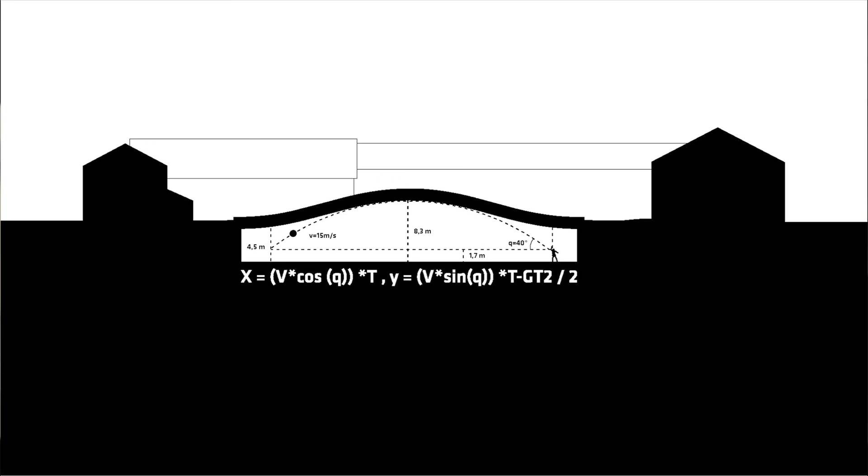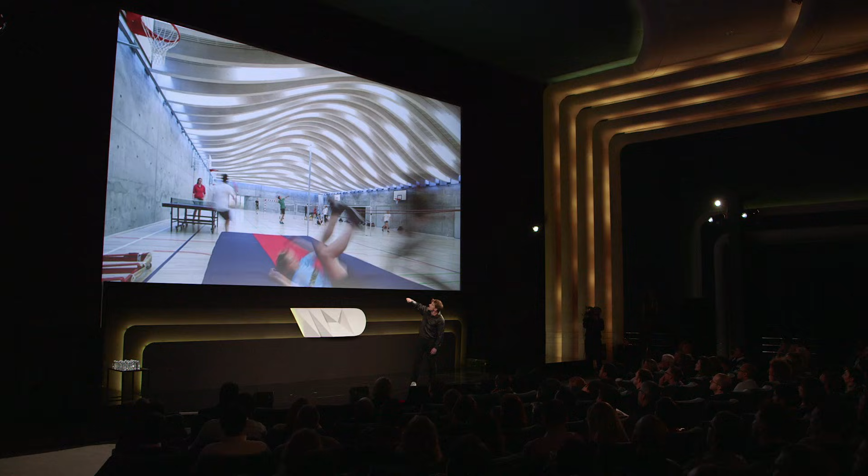On the perimeter you need 15 feet of clearance, and in the middle you need 25 feet of clearance. We actually got the commission from my old math teacher, so as a sort of homage, we based the architecture of the dome on the mathematical formula for a ballistic arch. So the graceful curvature of the glulam beams is actually shaped by the mathematics of the sport. Everything you see here isn't really designed, it's simply tracing the natural geometry of a thrown handball.

And as a result, it leaves an imprint up in the courtyard. It becomes like this informal furniture that has actually invited people to start hanging out. So almost like this cascade of effects - this basic tracing of the mathematics of handball suddenly creates this new space in the courtyard.

Another example is Hamlet's Castle Kronborg, north of Copenhagen. It recently became UNESCO World Heritage, and the Danish Maritime Museum used to be inside the castle, but they had to put it somewhere else. They suggested putting it inside the dry dock where they used to build ships. It was kind of a dilemma because UNESCO said we couldn't stick out of the ground as much as a foot, so as not to block the view of the castle. But of course, the museum wanted some kind of architectural masterpiece to attract people to come and check it out.

So we got this idea to use the museum as a way of preserving the dock, turning the dock inside out. We turn it into a giant void. All we have to do is design a series of bridges - one that stops the water from coming in, one that connects over to the castle, and one that takes you down into the museum. We could actually build all of the bridges in a Chinese shipyard and then sail them in and click them into place. So the architecture is completely manifesting all the aspects of shipbuilding, from the steel of the bridges to the concrete of the dock.

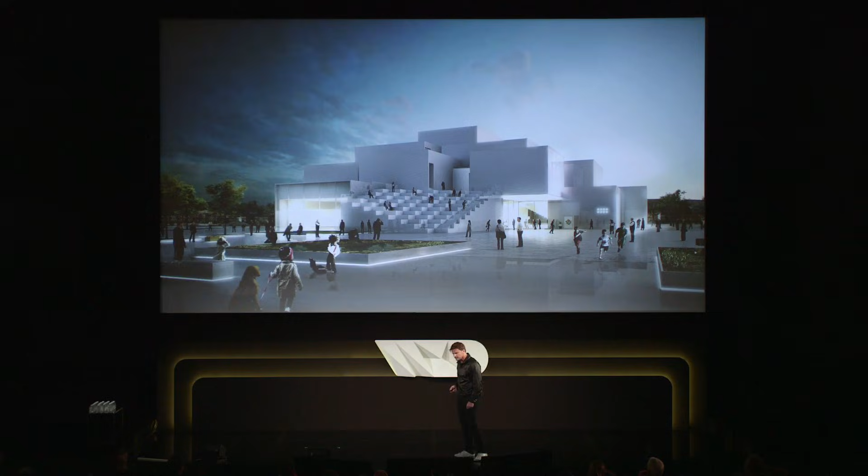But when they approached us to look at making a Lego house, which would be sort of looking at all aspects of culture through the eyes of Lego, we were incredibly excited. We went completely to town, and we really had to get this job. It's going to be where Lego is from, in Billund, Denmark. And essentially what really excites me about Lego is that Lego empowers children and everyone who plays with Lego.

to create their own world and then to inhabit it through play. And that's exactly what architecture is supposed to be about. It's, in a way, finding ways to empower people to influence their physical environment so that they can actually live the life they want to live.

The Lego house is under construction. This is me, standing on the foundations of these concrete Lego bricks. And this is me standing with all of the richest people in Denmark, the Lego family.

And if you can't wait, it's going to open in 2 years. But if you can't wait, you can actually build it yourself.

A way to get people involved is this idea of crowdsourced design. We did an urban space in Copenhagen, in the most ethnically diverse neighborhood in all of Denmark. It consists of what we call the Red Square, the Black Market, and the Green Park. You have 60 different nationalities living here, so the importance of the project was really to involve the local community and create a sense of ownership.

So we got this idea that it would be strange if the Danes had done the best bench and the best trash bin and the best lamppost. So we reached out to the local community through different media and through meetings and had people recommend elements from their home country. The basic idea is that we don't eat Chinese food to be nice to the Chinese — it's because we crave Beijing duck or noodles or dumplings.

And we didn't put a Moroccan fountain in the middle of Copenhagen to be nice to the Moroccans, but because they have an amazing heritage of architectural water features. So you have a Jamaican sound system — the neighbors hate it. A Thai boxing arena. You have Iraqi swings, litter boxes from Great Britain, bollards from Ghana, bicycle racks from Finland. The sign on the Red Square is actually a sign from the Red Square.

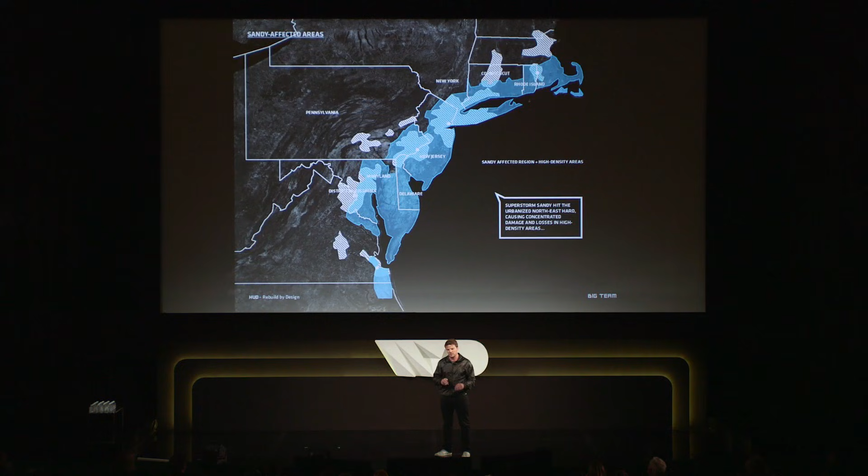Essentially, Sandy happened because the Atlantic hurricane belt is expanding due to rising temperatures. And because of the geometry of the New York Bight, you have this 90-degree funnel shape, channeling all of the storm surge into the most densely populated region in America, putting 50% of New York at risk.

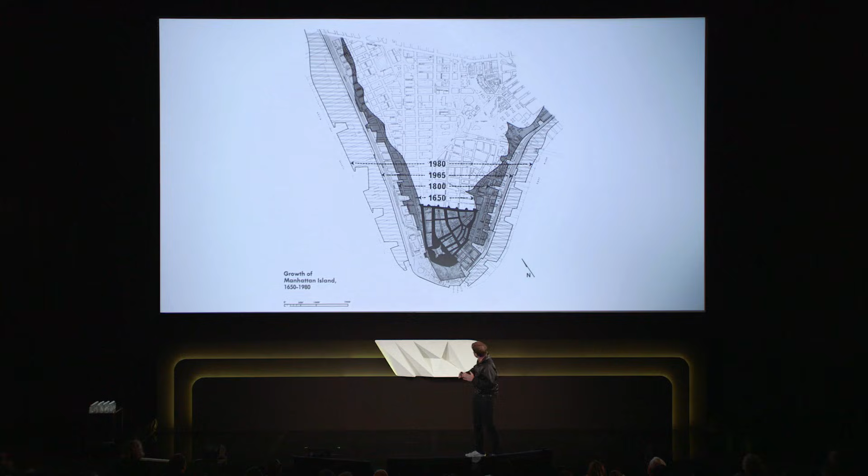If you look at this map of Lower Manhattan, you can see since the 17th century we've been expanding Manhattan through landfill, and this landfill is exactly the area that is now flood prone. So you can say the areas we've been responsible for creating are also the ones where we need to take greater responsibility in protecting. So the question is, how can you protect all of Lower Manhattan without creating a seawall that segregates the life of the city from the water around it?

We thought maybe we could learn a little bit from the High Line, a piece of decommissioned infrastructure that has now turned into one of the most popular promenades in New York City. We were thinking, what if instead of waiting for infrastructure to get decommissioned before adding the program, you could think of the resilience infrastructure for Manhattan as a Dryline, imagining it comes from day one with a lot of extra positive social and environmental side effects.

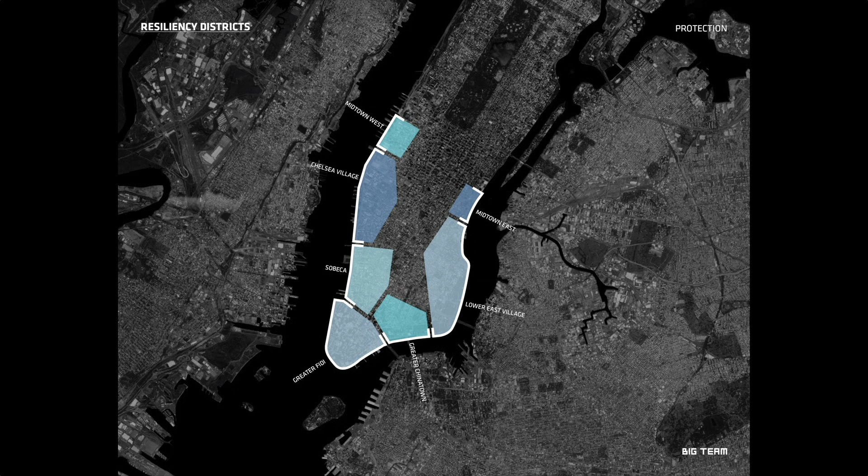When you look at the flood map, you have natural pinch points where the flooding doesn't get very far into the island because of the topography. So we use these to create compartments, just like you have compartments in a ship. Each compartment can sort of be solved on its own.

When you look at the urban development of New York, it's characterized by this David and Goliath encounter between Robert Moses, aka the power broker, and Jane Jacobs. Robert Moses did a lot of the necessary infrastructure investments of Manhattan, like the highways on the waterfronts and a lot of the social housing projects. But they were very top-down, and rarely instantly successful. They often cut people off from different neighborhoods, or cut them off from the water. One day he tried to cut a highway through Greenwich Village, and he met Jane Jacobs, who mounted a grassroots opposition, and eventually she defeated the plan, and Greenwich Village is still there.

We thought it could be interesting to think of this resilience infrastructure as the love child of Robert Moses and Jane Jacobs, because to provide 8 contiguous miles of waterfront protection, you need a holistic, big-picture perspective, but it needs to happen rooted in local communities. Essentially, the main challenge is to resist a certain amount of storm surge, you need a certain geometry.

But this geometry could be made in so many different ways, so that when you go there, you won't notice that this is actually part of a dam. It could be a piece of landscape that also becomes what protects the city from flooding. It could be various artworks, or almost like furniture, landscaping. You could imagine the median of the West Side Highway becoming an art piece that also protects the city from flooding.

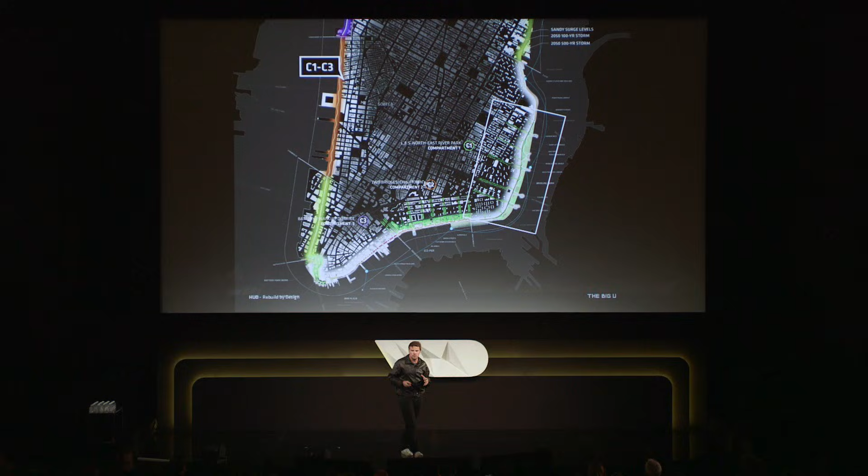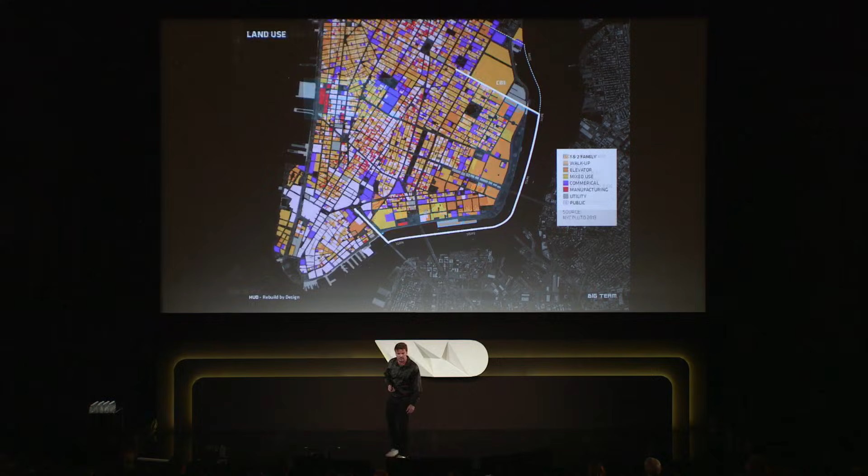As a way to do this, we went a step further. We went to the Lower East Side, which was massively hit by Sandy. These are the areas that got flooded, and when you look at the 100-year flood and the 500-year flood, actually two-thirds of this neighborhood is flood threatened. It's a primarily residential neighborhood, and this is actually a map of all of the public and affordable housing on Lower Manhattan. It's all inside this neighborhood.

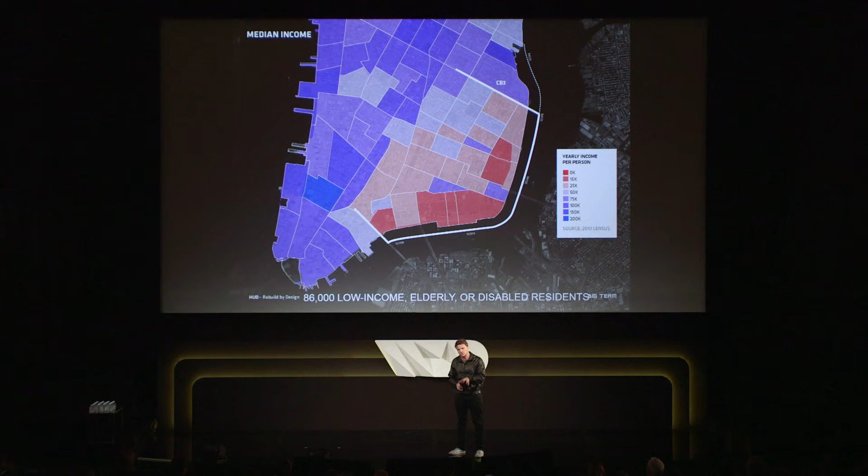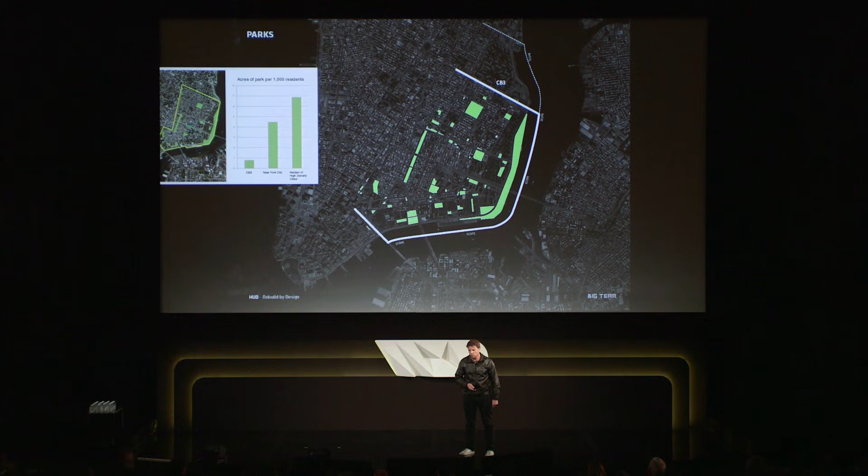It's also the most ethnically diverse neighborhood. It's the most socially challenged neighborhood. It's rather underserviced by public transportation, but in return it has a highway cutting it off from the waterfront. And even though it appears green, it actually has a lot less park than any other neighborhood in Manhattan.

95% of the surface is impervious, which also makes it more flood prone. And when you walk down the waterfront, you can see that it's tortured by this relationship to the infrastructure.

So we created this process where we reached out to the local community. We had a series of workshops with people from the Lower East Side, testing different ideas. We made a smorgasbord of different solutions, and together we formulated a series of strategies.

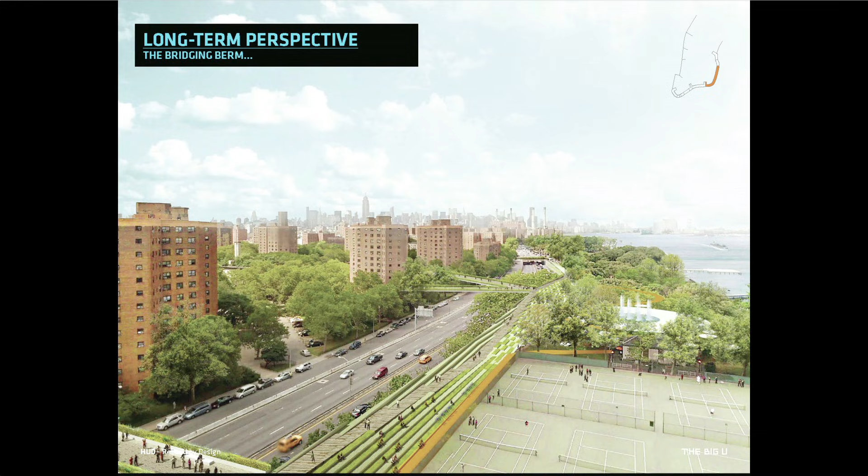One idea was in the East River Park, simply to raise the ground of the park to protect it from the noise of the highway and also protect the city from flooding. It could be phase 1 of a phase 2 to eventually submerge the park and integrate a new subway line underneath it, submerging the highway.

We're moving the bicycle lanes into the park side. The existing bridges, these caged highway bridges, become like high lines, extending, and we integrate ADA accessibility into the natural topography. You arrive in this sloping park that takes you out into the water.

We're also creating a 10th Street harbor bath, because the East River is actually so clean you can swim in it.

Underneath the FDR, we got this idea to turn the underside of the FDR into an asset. You have a lot of spaces in New York that are actually beautiful when you look up. So we got this idea of creating art pieces hanging underneath the bridge.

Normally you just look up, and you have local artists, and it illuminates and makes the underside more friendly. Some of them can flip down and create temporary enclosures, like for a Christmas market, or they can become what saves the city.

In some places, all you need is 4 feet of height to resist the 50-year floodplain. So they can be undulating benches serving different activities, and they also become what saves the city, serving as sockets for bigger flood barriers when you have a 100-year or 500-year flood coming.

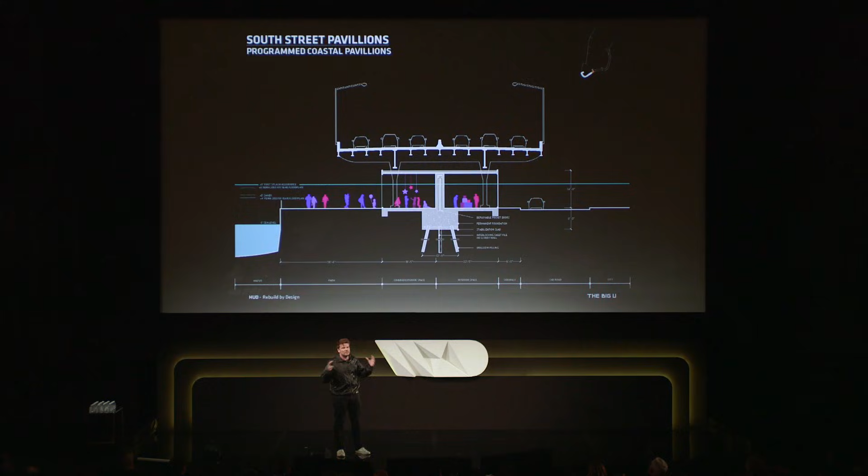Further down, we're proposing to create little pavilions that animate the space underneath the canopy of the highway, like galleries and markets that make the underside more friendly and lively, but also protect the city from flooding. They're placed so we never block the view from the side streets coming down to the water, so you always look uninterrupted down to the water.

But then you have sliding walls that can come out and actually stop a flood from coming in.

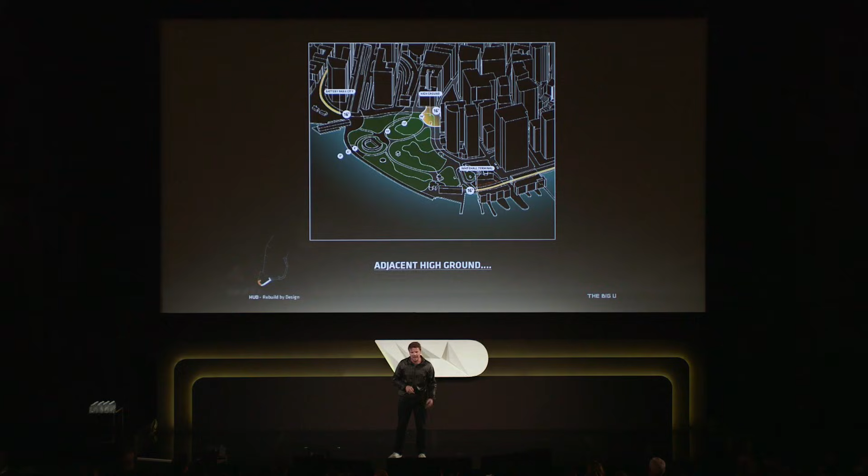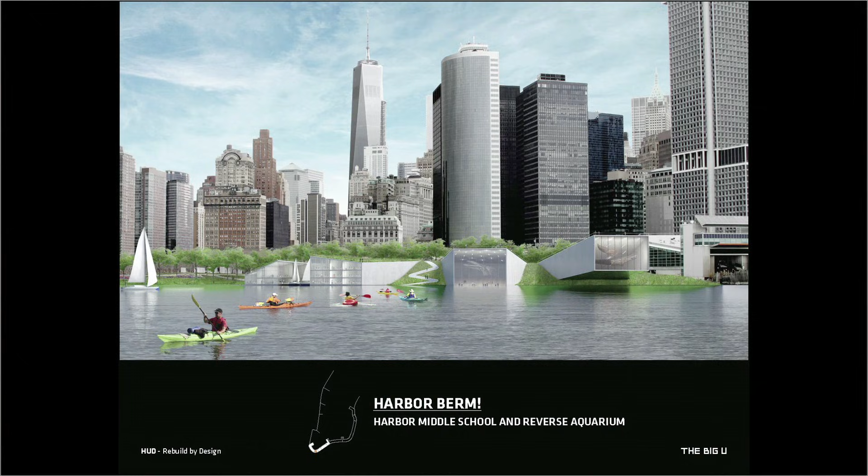Finally, when you reach the south tip of Manhattan, we're working with Battery Park to create a series of little events in the park that creates a natural topography. We're integrating a new harbor school and what we imagine to be a museum of cities on the water, where the big auditorium could actually be a reverse aquarium, giving you a view into the different flood lines of different storms.

So essentially the thinking is to take all of the hard infrastructure necessary to protect Manhattan from flooding, but always design it in close dialogue with the different residents of the different communities, so that as you move around, you won't sense that we've incarcerated Manhattan in a flood wall, but that we've reanimated Manhattan so that when the next Sandy comes, it's going to remain a lively city.

This project has just been granted $335 million from the federal government, so we're going to start phase one. But I often get the objection that this is a little bit too much like science fiction.

So just to give you an example of what we call social infrastructure that is actually happening right now: this is downtown Copenhagen, where we're doing a waste-to-energy power plant that basically turns trash into electricity and district heating.

When you look at it as a resource, 1 ton of trash equals 1 2/3 of an oil barrel in terms of energy, so it's a really valuable resource. But they operate on an economy of scale, so they're ugly boxes that cast shadows on the neighbors and block the views.

This is going to be the biggest and tallest building in Copenhagen, right next to the marina, right where the local boys go water skiing. In Denmark we love skiing, we have snow, but we have absolutely no mountains. But we do have mountains of trash.

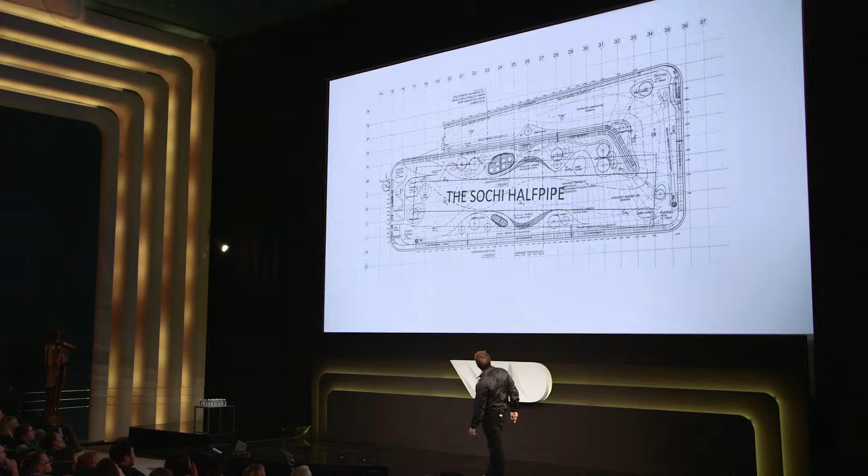Some of you might have noticed that Denmark got 0 medals in Sochi. We hope to change that, because now we can actually practice at home. Also, for the people not skiing, there's a hiking path. You can do picnics, you can enjoy the view of your otherwise completely flat city. We're including the tallest climbing wall in the world, 300 feet, for those who have the balls.

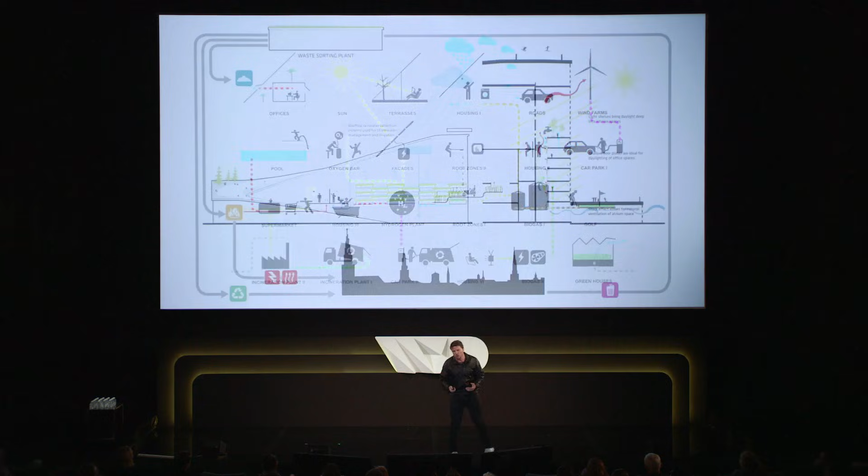Basically, the reason we could win the competition based on this idea is that it essentially turns the whole power plant into a man-made ecosystem where not only do we locally exploit the resources, but together with the city of Copenhagen it becomes like an urban metabolism.

But the reason we could win it was because this is going to be the cleanest waste-to-energy power plant in the world. The smoke coming out of the chimney is completely non-toxic, it only contains a little bit of CO2 and some steam. So that's why you actually have fresh mountain air on top of this power plant. Normally you want to be as far away from a power plant as you can—here it's actually completely clean.

But finally, as a way to completely reconfigure the perception of a power plant, we've worked with Realities United and Copenhagen Suborbitals to design the chimney in a special way, so that it accumulates steam, and at regular intervals it puffs a gigantic smoke ring. So essentially, something that used to be a symbol of pollution becomes something playful.

Of course, we couldn't find a smoke ring contractor, so we've been struggling quite a bit with figuring out how to do this. Just to finish off, we recently did a test at the end of August, trying to figure out how to do this, and this is how it went.